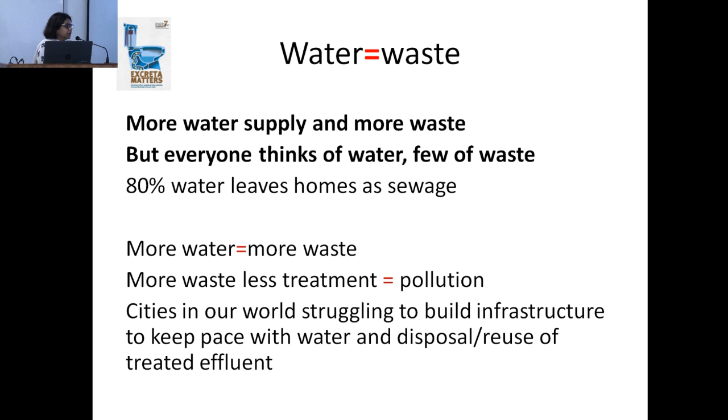Rajiv Ranjan ji here is the head of the Ganga mission, one of the most important initiatives of this government. What we are dealing with is a crisis of domestic sewage, and we're not understanding this as part of a common challenge. This is not just India—it's as much an Africa issue as an India issue. It's the pattern and paradigm of water and sewage we are adopting in our part of the world.

A few months ago, Desigan invited me to speak to water engineers in Cape Town, right after Cape Town had just missed its 'Day Zero,' when the city was going to run out of water. It was clear to me that Cape Town was in that crisis not just because of climate change, but because of the system and paradigm of water and waste it had adopted.

The system and paradigm is very simple: cities are getting their water from longer and longer distances today, because either local water is unavailable or contaminated. You cannot get water from the Yamuna anymore because it's so contaminated—you have to bring water long distance from the Ganga for cleaner water. But this increases the cost of water supply, distribution costs, and losses, and cities find it difficult to recover the cost of water supply.

More than that, cities have no money to spend on waste treatment. If you supply water, you will have waste to take back. But the cost of taking back the waste, intercepting it, conveying it, and treating it to potable levels is high. And remember, your rivers today have lost their assimilative capacity, so you literally have to treat the water to near drinking water quality before you can discharge it into a water body.

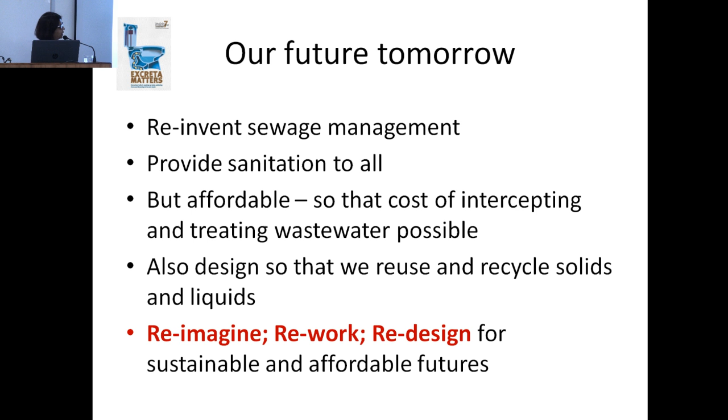Arne is here. Arne was the one, Mishraji, who introduced us to what we call shit flow diagrams. He was the person who came to see me and discussed this, and I am obsessed about shit or excreta. So when he came to CSE he said, I want you to do shit flow diagrams. I said, what? But it has really helped, because the shit flow diagrams help us to envision a city.

Because the shit and the excreta is so underground, and as I said, when we did our 71 city analysis, we understood the water supply, but we really didn't know where the sewage was flowing. What the shit flow diagram has done is help us look at the city, city-wide. You get an idea in terms of the on-site system, the off-site system. You understand if the excreta is collected and how. How is it transported? How much of it is safely disposed of?

And today in India, I was asking Bitush. Bitush told me that India would have at least 500 to 600 shit flow diagrams now done for different cities. Dinesh is here, he has done excellent work doing shit flow diagrams. There are many others, so now a lot of this mapping has happened.

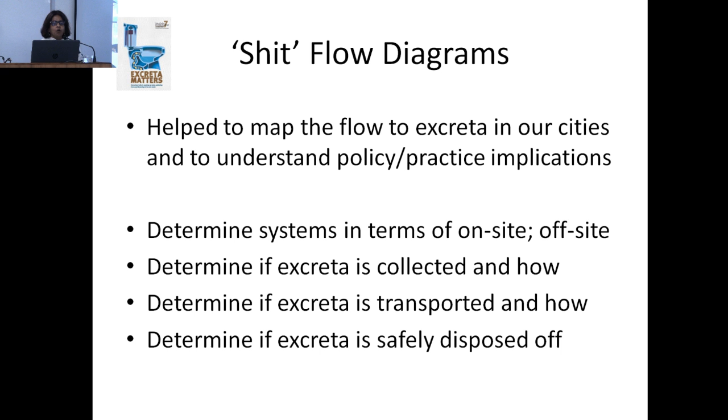When my colleagues, Suresh's team, worked on UP, we came up with these two reports on septage and cities of Uttar Pradesh, an assessment of excreta management done through the tool of shit flow diagrams. What really came out, Mishraji, and I think this is a very important revelation true for most regions of India, is that 70% of the state of Uttar Pradesh is what you would call on-site, which means anything from a well-designed septic tank to a tank, to nothing more than a hole connected to a drain, but it's on-site.

We also found that 80% of the septic tanks are connected to open drains where the liquid is discharged. 50% of the septic tanks are mechanically cleaned, so 50% are not. 90% of the septic tank waste - and septic tank is in quotes because these are not well-designed septic tanks - is not treated, and is disposed of in drains, rivers, and land.

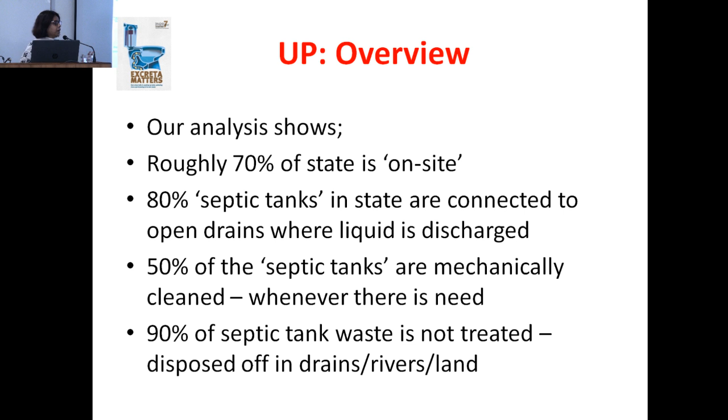73 to 80% of the sewage is flowing into open drains, it is not collected, it is not safely treated, and that is the crisis of pollution today.

But this is what excites me. When I saw these charts two years ago, I actually got really excited because I saw this as an amazing opportunity to reinvent completely. Because at some level, if these systems are far more cost effective, you're not building underground sewerage, which, when I did our book Excreta Matters, cost 1 crore per kilometer.

I'm sure it's gone up to 5 crore a kilometer now.

You also have to think about it very differently, that people are managers. If the septic tank is overflowing, people will get a backflow.

One of my solutions, Rajiv ji, has always been to the Ganga pollution, that you put a plug on every drain that flows from a city into the river. Let there be a backflow. Let every drain flow into the city. Then people will know what sewage is all about. Why should the river get our sewage?

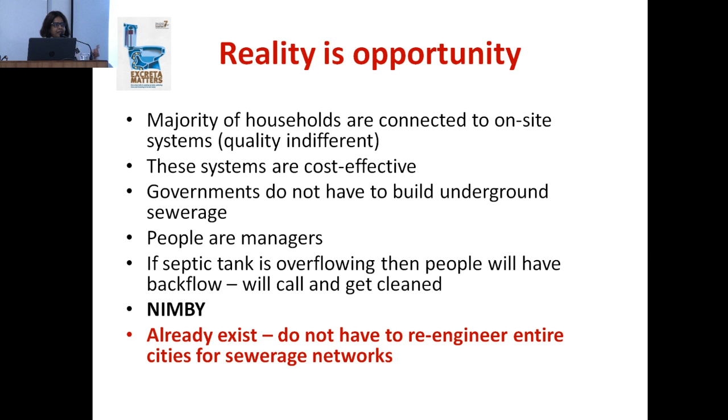And why this is possible is because this is what the world is doing. Just think about it, all of us today have mobile phones with us. I am of a generation which actually had to go to somebody very important in government and get a connection for a phone because it was a landline. Today we have all moved to mobile phones. We have all changed the way we actually do communication by getting rid of the landline.

The energy system is talking about doing rooftop energy systems. So why, in the case of fecal sludge, why in the case of sewage, can we not skip, leapfrog the landline system in which you laid the pipes before you could get sanitation? You could think about it, and you are thinking about it, we are all thinking about it, as a completely different future.

So what is this conclave's agenda? I want to lay down some of the questions I have. And I want some amount of discussion, and I'm hoping over the next 2 days we'll have that discussion so that we have a clear idea how we move forward.

My first question is, what is the right legislative framework for this on-site system, for on-site sanitation systems? Because currently, if you look at it, we have the Environment Protection Act and we have city bylaws. What is the best municipal bylaw system which needs, because you have an urban policy. The urban policy is a good peg. But what is the actual legislative framework you provide for sanitation management at the city level is something we need to learn from cities, what's happening, what's working, and then come up with the right model that we can adopt city after city, state after state.

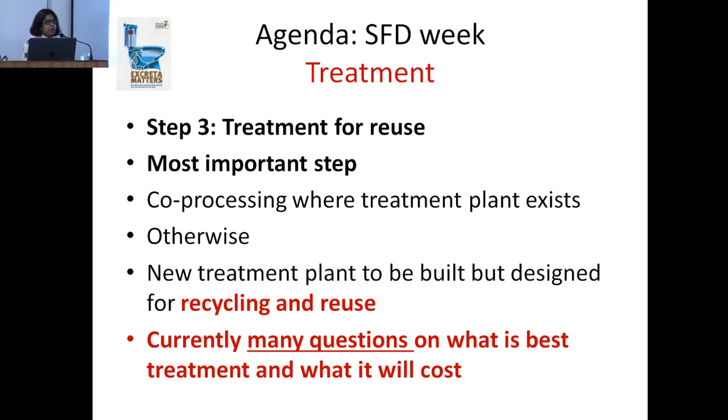The system that I really want to ask about is, what is the best treatment system? What will it cost? One question is what do we mean by fecal sludge? A lot of systems are designed so that liquid and solid is mixed, and a lot of systems are designed so the solid is separated from the liquid. The characteristics of the waste change enormously, and that's why the question becomes, how do you design a treatment system capable of handling all of this?

On the third day, we're going to spend a lot of time understanding each of the treatment systems cities are designing, and understand the inlet and outlet parameters. The biggest question is, how does the sludge and effluent discharge work, what are you designing your system for? Are you designing it so that, like a conventional sewage treatment plant, you discharge treated effluent onto water and keep the solid sludge on land? Or are you designing your system very differently, for reuse? That, to me, is the other exciting part of this agenda.

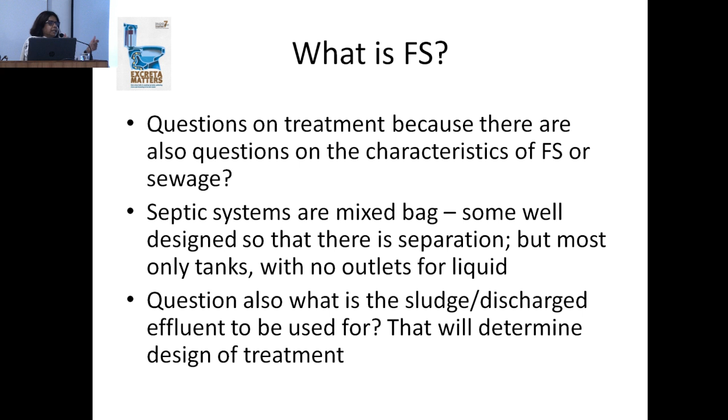The fact is, current sewage systems are water-based systems. You take a little bit of human excreta, nitrogen and phosphorus, flush it using water, convey it using water, and after treatment your disposal is also water. This destroys the nitrogen cycle of the world, because we eat the nutrients and excrete the nutrients. Using those nutrients back on the land would be a perfect circular economy, returning nutrients back, enriching the soil, and building much better nutrition for human beings.

So this is the real option that exists with these systems: how do you reuse and recycle and put it back on the land? This is where I think the maximum work is happening, Karthik is sitting here looking at how to use compost and excreta to make pellets for energy. This is where the big scale-up is possible, because it would mean you've fixed a lot of urban problems. You're not polluting your rivers, you're returning waste back on the land, doing something substantially different than the conventional sewage system.

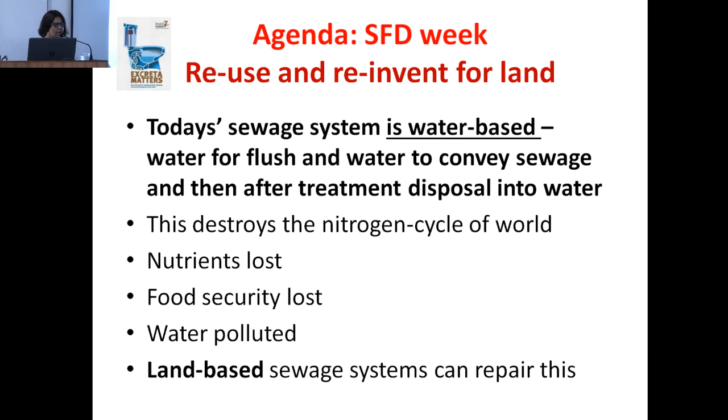The last two points I want to make are, I think this is going to be at least CSE's focus: for us it is a city-wide sanitation approach, and the outcome is the quality of the river. So we need to measure and monitor what we're doing for the entire city. And the bottom line has to be affordable sanitation for all, that you're intercepting the sewage of all.

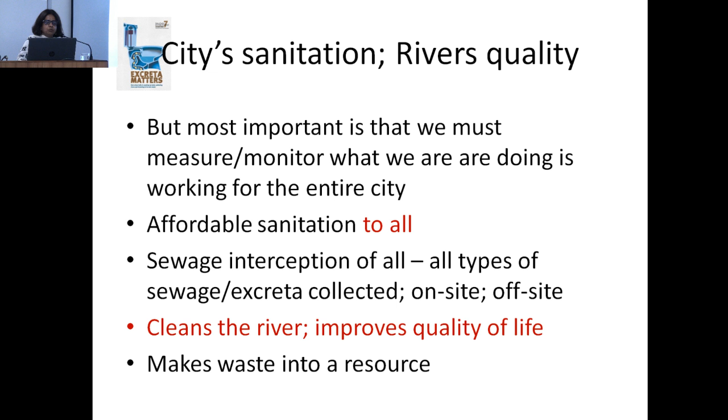That's where we need to break the silos. We cannot only say it's only septic tanks; if there is other sewage, we need to intercept that as well. So you need a city-wide approach. And the ultimate answer has to be: does it clean your river? Does it improve the quality of life? Does it make the waste into a resource? That, in my view, is very much possible.

This is really the agenda for the next two days that we have. We deliberate on what is possible, how can we make it work. We learn from the experiences and practices of many people working on the ground, and then see how can you upscale it, replicate it, build it into government policy, because that's the scaling up we all have to work towards. It's government and city policies which will really make the scale-up possible.

Because finally, let's be very clear, we all live downstream, and your waste is my water. And that's really got to be the message for our work on FST. Thank you very much.

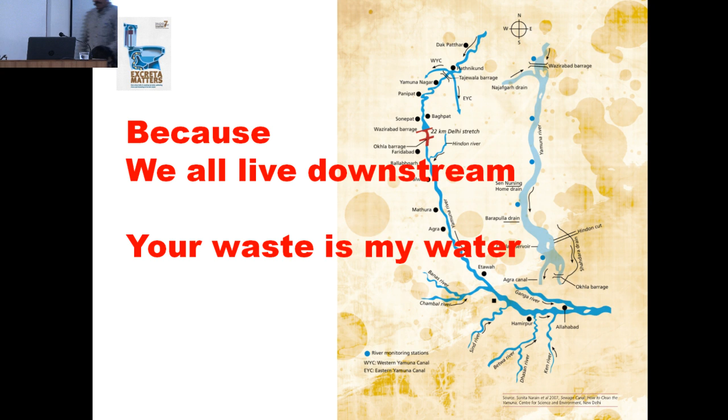Thank you, Sunita, for the powerful message and setting the context. Now we have Water Research Commission CEO Dhesigen Naidoo. He is representing Water Research Commission, which is a partner institution of CSE. We work under the global program in South Africa. And I should tell you, they have also gone through a major crisis.

South Africa, Cape Town, was the first city to go dry, and people really started rethinking that. They are also the country which has taken lead from the SFD work, what we are doing in India, and they have decided that across South Africa, they would do shit flow mapping or excreta flow mapping, if I am allowed to use this alternate term. And we partner with them.

We are also working on how we can address the issue as together water and sanitation is seen. We have a partnership with Water Research Commission on water sensitive design and planning. My friend Jay, who is here, he has said that why only water sensitive? Why can't we have sanitation sensitive design and planning? So this is a very interesting thing. We connect water and sanitation. We cannot talk separately. And Dhesigen, here, invite you to share your experience.

How did you save the city of Cape Town? And how can we learn from this experience and the SFDs and many more things to come? Thank you. Your presentation, I know, is loaded.

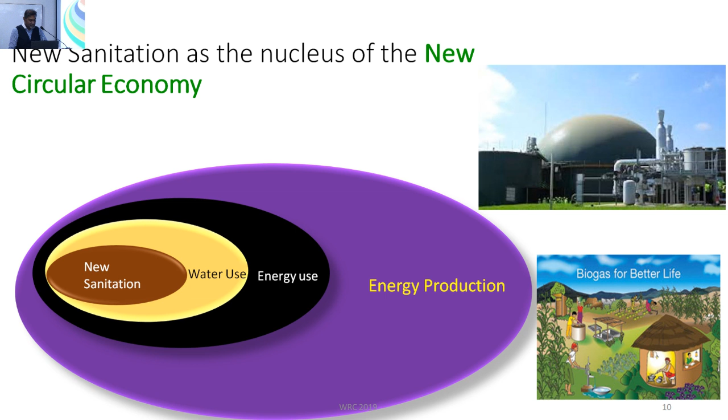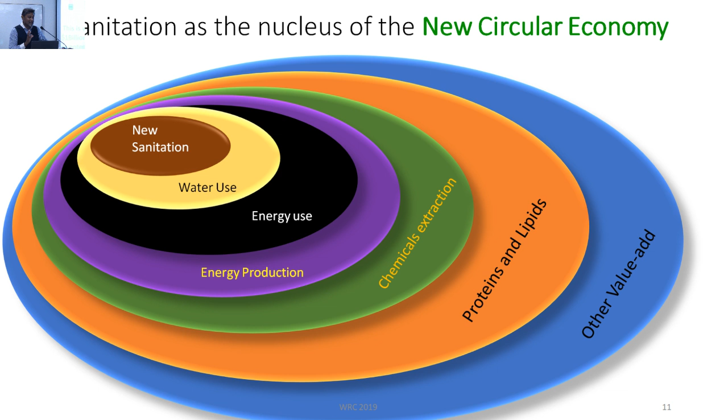There are other very interesting value adds — I'm not going to go too much into that, and I think there's some space later in the program to unpack some of these in more detail. But making the case for a $1 billion a year industry has actually become quite easy, and not on tomorrow's technology platforms, but on the technology platforms that already exist today. This is an idea we should capture and start running with.

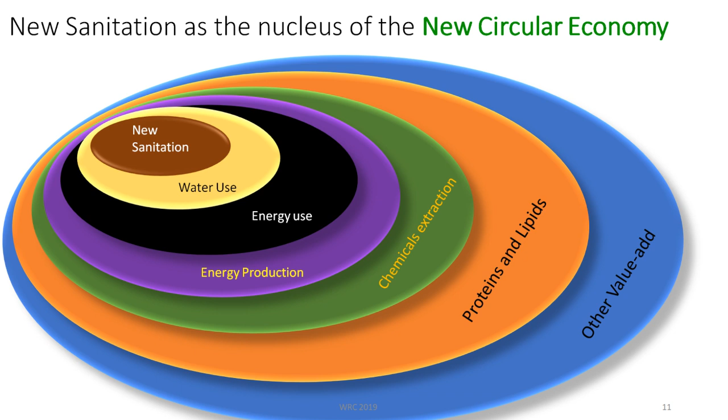In South Africa, we have done some things in the government space to help us along this road. One thing we have is a national industry policy framework, which in every year revisits priorities in something called the Industry Policy Action Plan, or IPAP. The 2017 version of this included water and sanitation as a priority, very specifically new sanitation.

Now, what this means in the South African context is that it provides the prioritization for all the public agencies that co-sponsor the development of industry. We're talking about the Industrial Development Corporation and the Public Investment Corporation, and a whole range of instruments around that. So it's actually quite a powerful tool.

So moving a little further, the fourth lesson that comes out of Cape Town is that organizing around a very old practice of certain units sitting in government, with a technical base of professionally trained engineers and practitioners, is in fact sufficient to manage the water and sanitation system in the world. It is not. It actually never has been. And so the idea around expanding these teams and empowering the people around us to participate in these teams is in fact the only way to go.

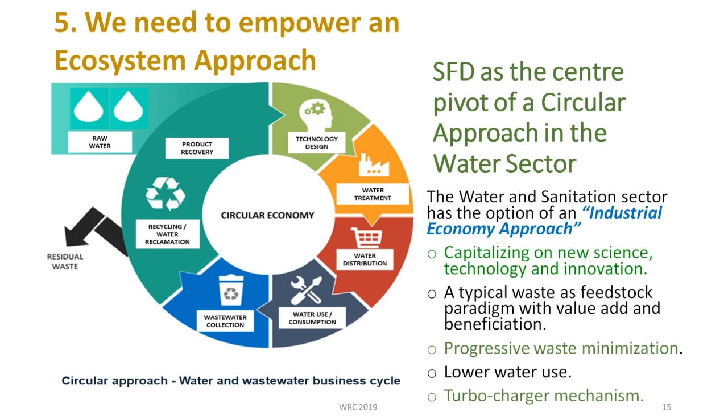So colleagues, that's what I have to share with you this morning. All of the work is also supported by bunches of reports that are available to you free of charge on the internet from the WRC website.

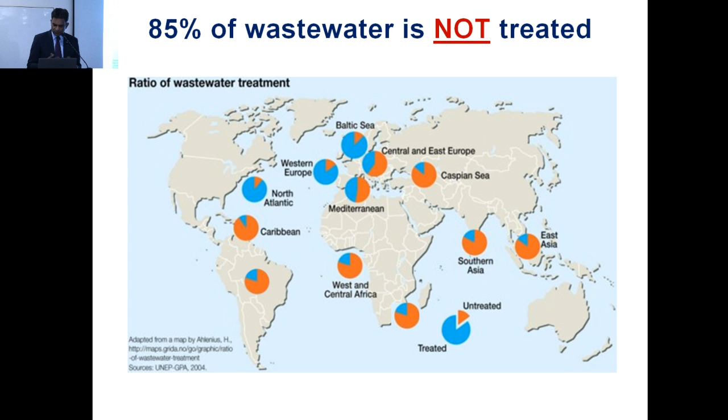You still have problems where we're not dealing with this fairly toxic material that creates huge environmental issues. Of course, we have really ignored at our peril the whole area of non-sewered sanitation, which the majority, particularly in the developing world, experience. Historically this was a very neglected space and it was ignored, so you had fairly inelegant solutions to these problems—quite dirty, not very efficient, and very ad hoc. But now you see much greater attention being paid to non-sewered sanitation, and we are slowly seeing much more elegant solutions that are becoming quite cost-effective.

Also, the opportunity that Sunita mentioned about recovering value from our waste streams is potentially giving us a chance to sustain the sanitation delivery chain from some of that generated revenue. There's been quite a lot of work done in this space, and from my perspective, I think this is where the focus will be in the next 20 years—the golden era in terms of wastewater and sanitation. You see huge investments taking place in Asia, both in China and in India, and Sub-Saharan Africa having a big interest in deploying both non-sewered and sewered sanitation systems.

In terms of non-sewered sanitation, there have been a lot of developments, and organizations like the Gates Foundation have been instrumental in pushing some of this innovation. We're starting to adopt very systematic approaches to the design of these systems—they're no longer ad hoc, but actually being engineered in quite an elegant way. You're seeing decision makers in some utilities who were always fixed on going for a sewered approach slowly starting to appreciate that non-sewered sanitation is probably more appropriate for their context than having a sewered system.

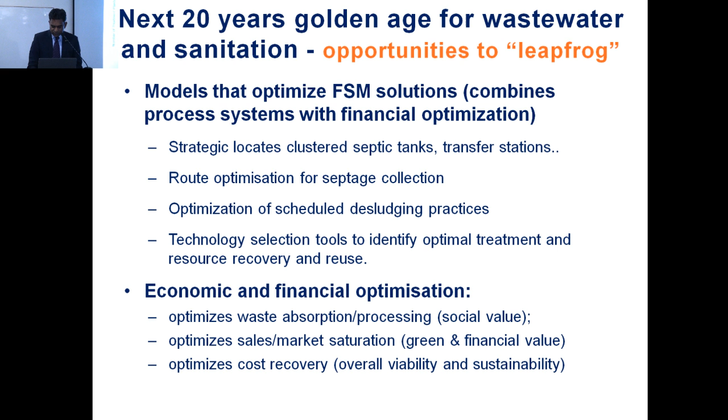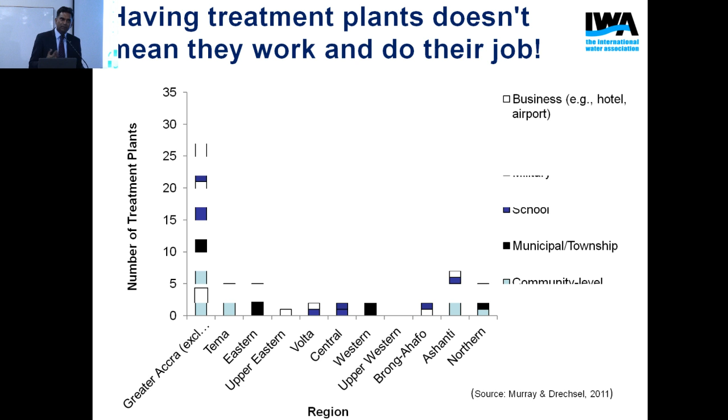And this is what is resulting. But what's interesting for me, coming from a developing country myself and having worked a lot in the developed world, is that when you look at wastewater provision in the developed world itself, the last 50 years was really like a pilot study. They started building very clumsy systems, huge grey infrastructure that was over-designed, and they iterated over the last 40 to 50 years.

Now you're starting to see some optimization taking place, with innovations particularly in changing the physics of these systems that reduce their overall footprint and energy cost, making them much more efficient. But in the developed world, they don't have the capacity to adopt this because they have so much legacy infrastructure.

But I think for the developing world, there's an opportunity to capture some of these interesting innovations that improve the settleability of our sludge, for example, or allow us to increase loading rates in our digesters by heating them. These innovations could potentially allow us, if we do go for conventional wastewater treatment systems, to develop them in a much more innovative way, contextualized for our conditions, so we have small footprint, low energy systems. I think there's a huge opportunity.

So I think both in the non-sewered sanitation space, you're seeing the evolution of very elegant and efficient systems, but also in the more conventional wastewater space, I think there are these opportunities.

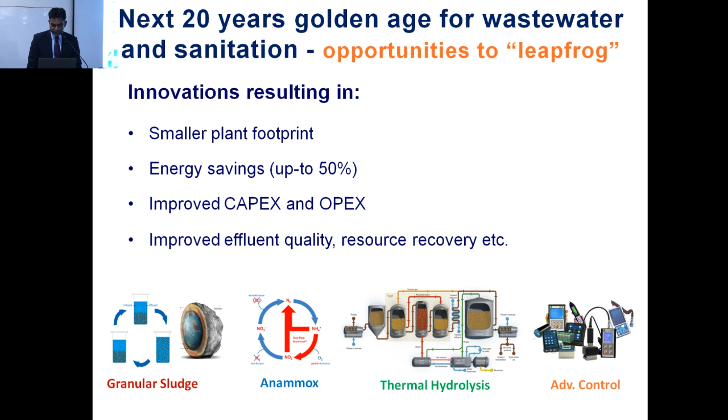So the question, as I think Desigan pointed out, is do we apply 19th century approaches—these very linear, highly energy-inefficient, centralized systems—or do we go for something a little more elegant, a little more clever, either non-sewered or sewered, but understanding where we currently are in terms of technology.

Now, when I think about decision makers and what they're struggling with at the moment, it's really that the status quo is not an option. As was pointed out earlier, there are lots of global change pressures we're experiencing. Of course there's climate change affecting our water resource availability, both in terms of quantity and quality—both too much water and too little water. It's affecting us. But people, populations are growing, particularly urban populations, and these populations are not only growing, but growing up, so their rate of resource utilization is also increasing. So we cannot continue to run our systems the way we've done before.

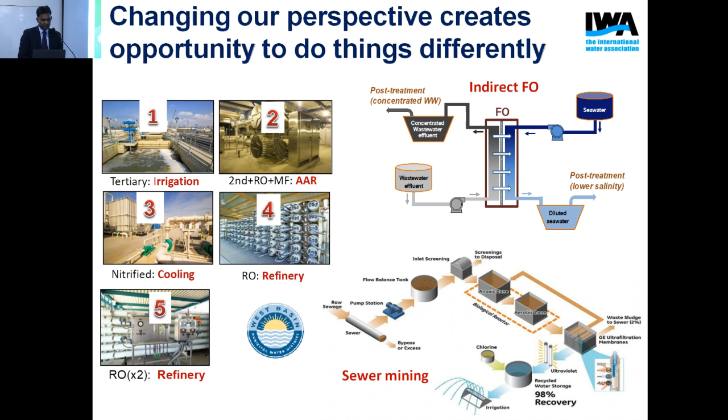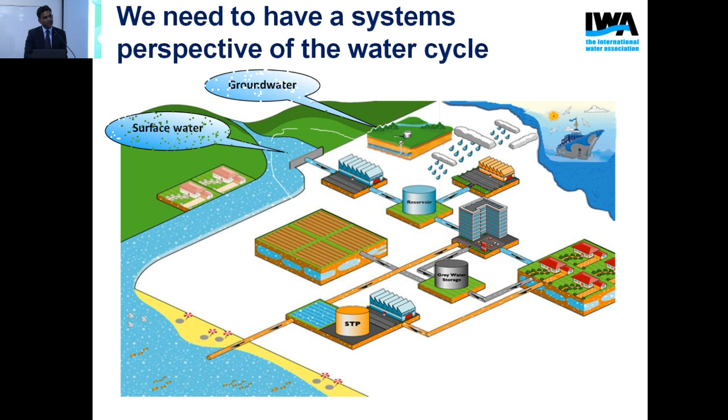The key to doing that is to have a very holistic view of your water cycle. So you don't look at drinking water, wastewater, and stormwater separately, but view the cycle as one, and look at all the waters that flow within that cycle. You recognize that all of this water is good water—it's just water of different qualities.

You start to ask: for certain types of demand, where should I put my investments in terms of water? If I have demand for more drinking water, do I pump more surface water, or invest in leakage reduction—which is actually high quality drinking water—freeing up more drinking water, or in water conservation? If I want to water my plants, can I use grey water or treated black water for that purpose? When you look at the entire water cycle as one, you start to be able to do water balancing—this is quite a major shift in the way the water sector views water flows.

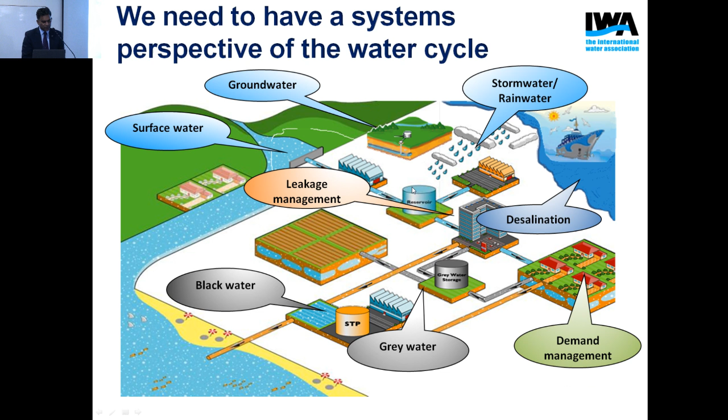Critical to this is modeling, and this is where you try to connect the dots—connecting these different flows for these different uses. What you start to do is invest in efficiencies as opposed to investing in new infrastructure to move water. You see a lot of development in this, with modeling where people start to model packets of water, and those packets have signatures in terms of the effort used to produce that water and its qualities, so you can match that water to that need.

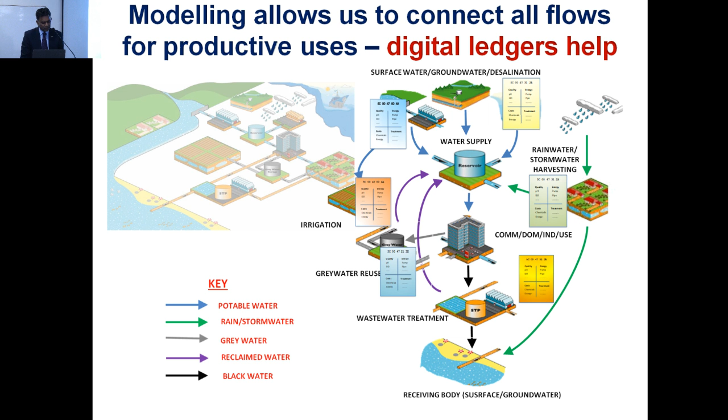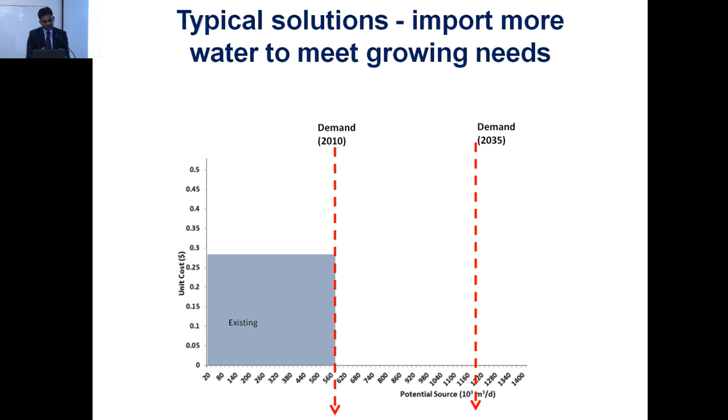This is an example of work we did some time ago in Nairobi. The traditional engineering response to growing demand was just to find new surface water—that was the traditional, left-brain thinking. But once you start looking at water in its entirety, you realize there are lots of flows within the system that allow you to meet that growing demand without investing in new infrastructure. You can bring the unit cost of water down by investing in these efficiencies. And if you do more exotic things, like treating black water, the price of water might go up. So these models really allow you to recognize where you should put your investments—it tells you.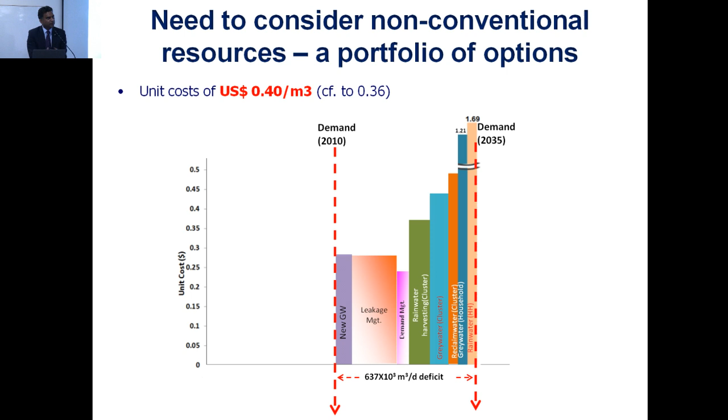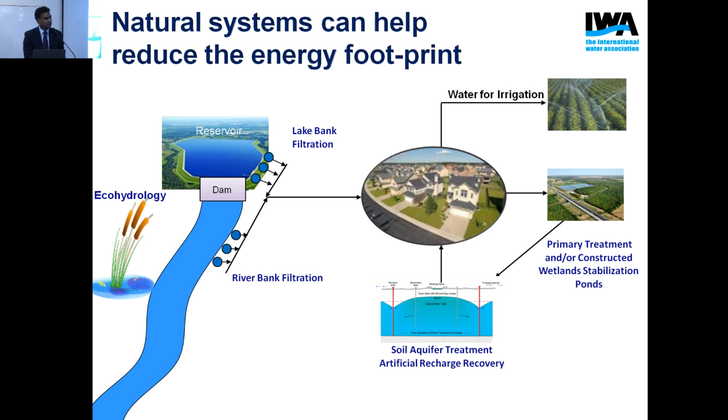And of course, it's not only using grey infrastructure type technologies. Natural systems can play a huge role in closing the water loop. You can protect your water bodies with vegetation and eco-hydrological approaches. You can use things like river and lake bank filtration to treat your water before it gets into supply. And on the wastewater side, you can use constructed wetlands coupled with soil aquifer treatment to polish your water before reuse. These systems have much greater adaptive capacity and can manage shocks much better than grey infrastructure, but there's a land requirement associated with them, and the energy cost is low.

So what I was really talking about is very much a systems perspective. You start to view your urban water as a system, but actually water is a system of systems, and the city is only one user. Once you start looking at your entire watershed, you start to observe opportunities to do clever things.

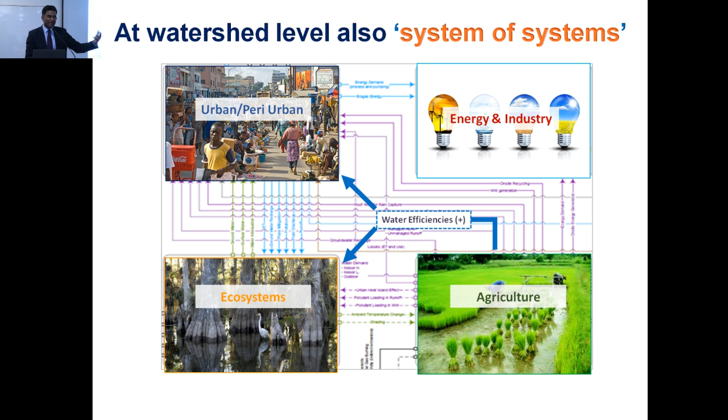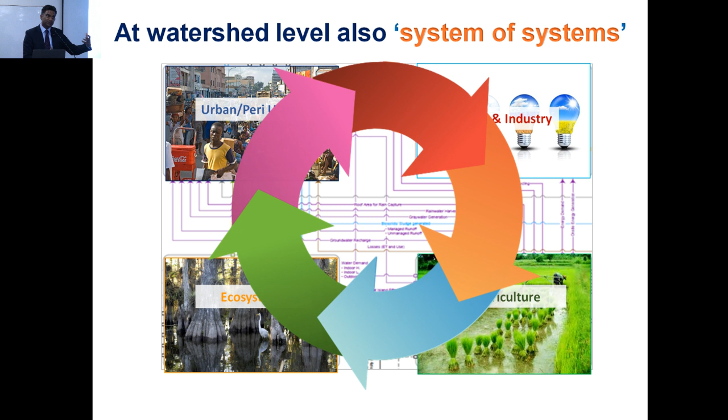As an urban person, we tend to optimize our urban system, but there are synergies that take place between these different sectors. If we start viewing the watershed as one, we can develop solutions where we're investing in another part of the water cycle in order to reap benefits within our own water cycle. I always say in a country like India, the urban water sector and agriculture have to be like brothers and sisters, because the synergies and benefits of them working collectively, in terms of reducing the overall water footprint and using nutrients we can recover from our waste streams, is huge.

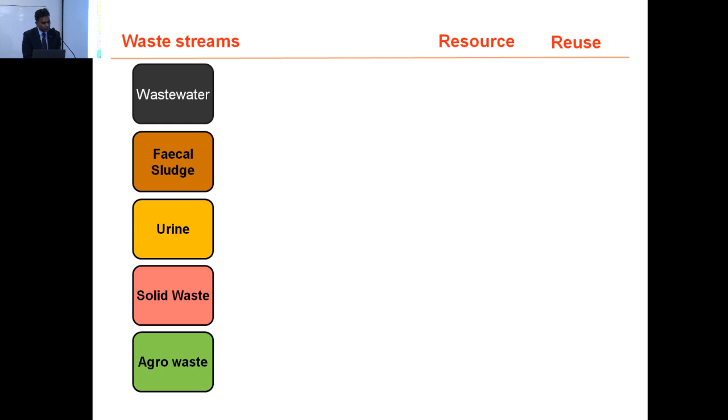The other big change you see in the water sector, and it was talked about a lot, is the way in which we view waste. It's not just our wastewater or fecal sludge, but there are lots of other wastes we can combine to produce various types of products. It's about thinking how we can co-digest or co-utilize lots of the waste streams to produce both energy and water, because a lot of this is water, and things like nutrient recovery.

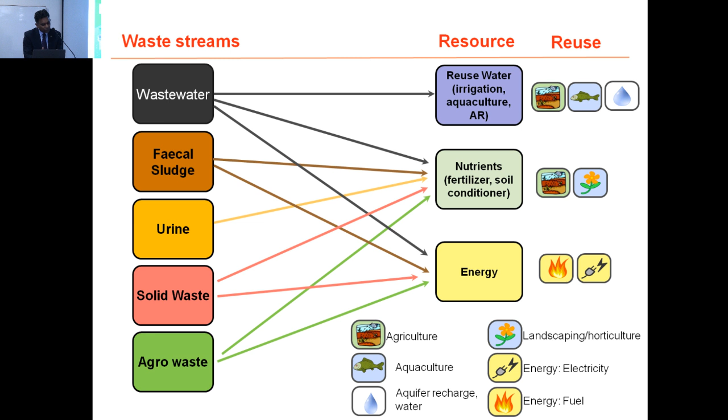Viewing the water cycle as one allows us to understand where within the water cycle there are opportunities to recover, say, energy, which could be upstream. The Water Research Commission has done work on microturbines on the drinking water side. If you have sewers, you have opportunities to recover heat, and if you have elevation, you can generate energy through turbines, either in a decentralized or centralized approach. And then nutrient recovery through, say, fecal sludge management, big opportunities, but also within your treatment works.

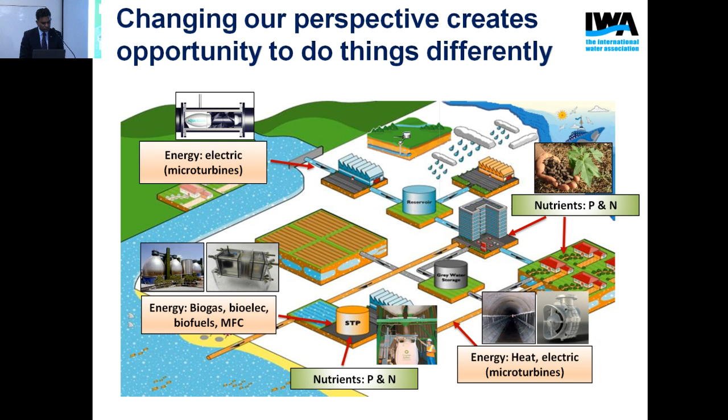The biggest challenge in that space of resource recovery and reuse, as mentioned earlier, is that we don't actually fully understand the business models. What we tend to do is engineers talk about how much of something they can produce - they say, I can produce so many tons of fertilizer - but they don't really understand if there's a market for that, and they don't understand what their competitive edge is against other fertilizer producers.

What's really important is to shift our thinking a bit, on the creative side, to understand that if we produce these fertilizers, who are our customers, what is our value proposition to them, and what are the costs associated with channeling that value proposition to those different customer segments. We did a lot of work on this and found that a lot of these systems currently don't work - they work when there's risk capital supporting them, but when that risk capital is withdrawn, they're not sustainable. It's still work in progress, but clearly this is the direction we have to move in.

They think that because they're producing fertilizers, they're making a lot of money. This is deployed in big plants in the United States and in Canada. The largest wastewater treatment works in the world, the Stickney plant, has this.

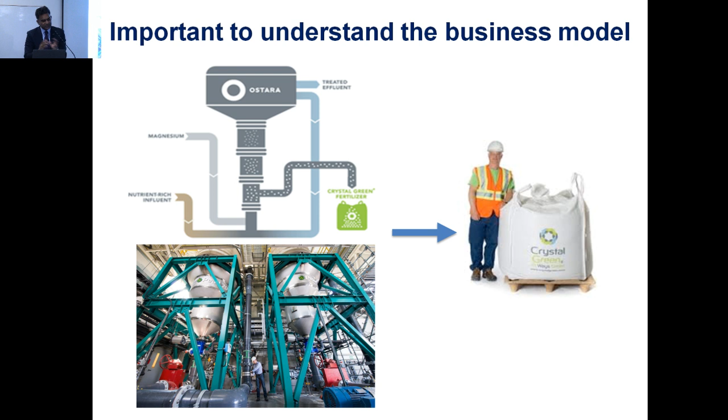What we're finding now is that this idea of thinking about the productive use of water and looking at how to recover resources, the language in the water and sanitation sector is changing. We are now starting to not talk about water treatment or wastewater treatment. We're starting to think about machines — machines where water is actually the feedstock, and it can be water of different grades coming from different sources.

So it can be water that's already been used, or water coming from the surface or groundwater. And this machine, with various types of technologies, you turn the handle, and it can produce waters of different qualities for different users. This machine can produce energy, either in the form of heat or in the form of electricity, and it can produce nutrients.

People are now starting to say, are we actually designing an energy machine where water is a byproduct? And if that's the case, what type of technology should we use, and where should that machine be located? And if we're trying to primarily produce nutrients, again, what type of technology and where should it be located?

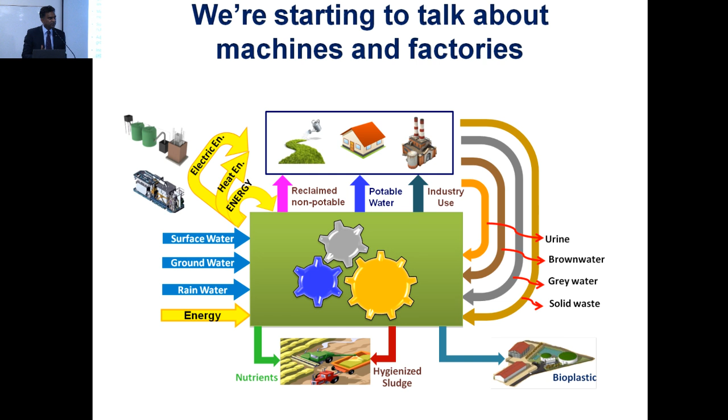These are some examples, I'll skip them, but what you're finding is that when you're trying to do these clever things with water, size starts to matter — scale. Water is quite heavy, so if you want to reuse it, you don't want to move it long distances and then move it back. So these centralized systems don't work very well for these clever things.

What people are finding is that if you can create decentralized systems for populations of around 30 to 50,000 inhabitants, you can do these clever things. And what's interesting is that if you have emerging areas, populations that are growing, you have this adaptive capacity — you can slowly start to grow your services over time. You don't have to invest in large centralized infrastructure, but can add modules because you're dealing with decentralized solutions. So it gives you a huge adaptive capacity.

I'll skip this. I just want to go on — by the way, at IWA we have a program called the Water-Wise Cities, which talks about some of this.

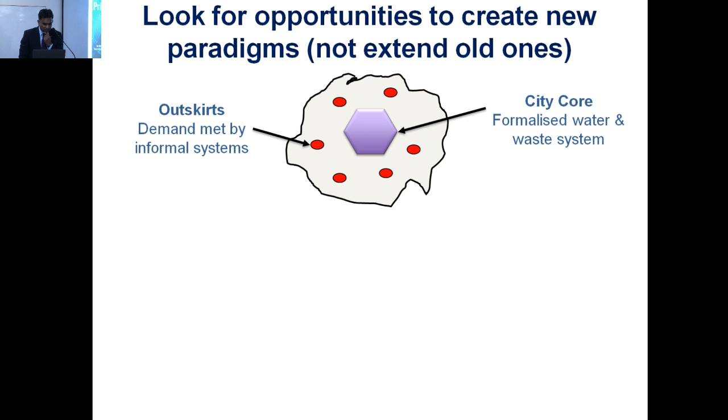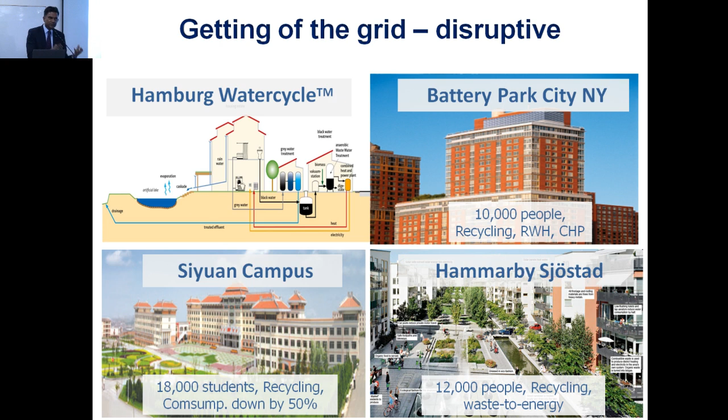I think we tend to believe, going back to the grey infrastructure within the water sector—and this is thinking from a colleague of mine, our vice president at IWA, Sudhir Murthy—that the wastewater sector is full of elephants. Elephants are animals with very long gestation periods, so there's a lot of thinking done before you deploy them, and there's a correlation between long gestation periods and long lifespans. We tend to think our water systems are basically elephants that will be there for 50 years.

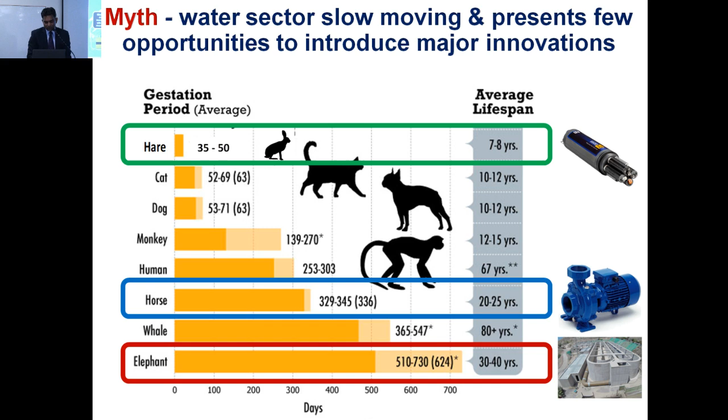This is from where Sudhir used to work at DC Water, where they had a very old system full of elephants. But they started to deploy these technologies—mainly horses, mixing devices, the Cambi process—that changed the physics of their processes so they could increase loading rates and efficiencies. So what they could really do is repurpose the elephants and get efficiencies.

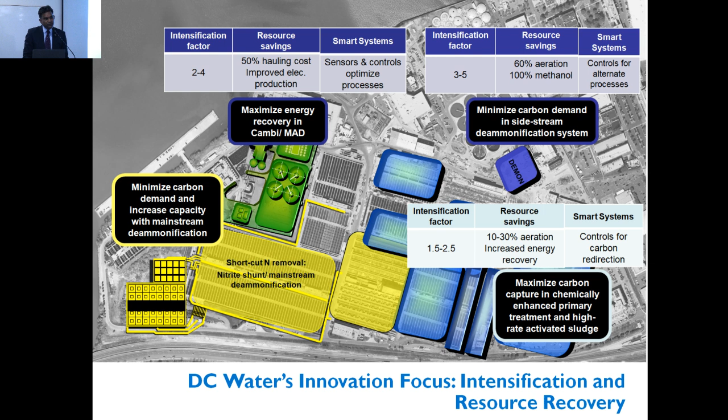But the key to this is to really decouple the way we think of our structure. We tend to think of it vertically, so the elephant dominates everything. But if you decouple this and think of it more horizontally—where the people who procure the rabbits and the horses are independent of the people running the elephants—then you can constantly innovate. This idea that we're conservative because of elephants is really wrong, but it's the way the culture of the sector is; we tend to let the elephants dominate.

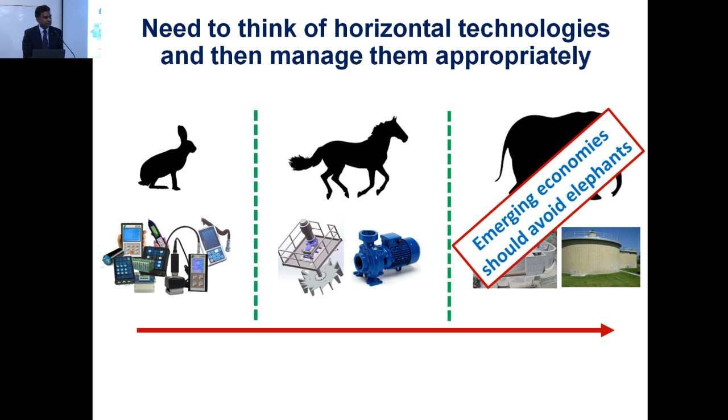The big opportunities for us are to look outside our sector for control mechanisms and digitization, and for mechanical devices that improve the physics of our processes—that really allows us to improve the overall efficiency of our systems. And in these emerging economies, you would avoid at all costs putting in a lot of elephants, so you'd go for more package plants and avoid building large concrete infrastructure.

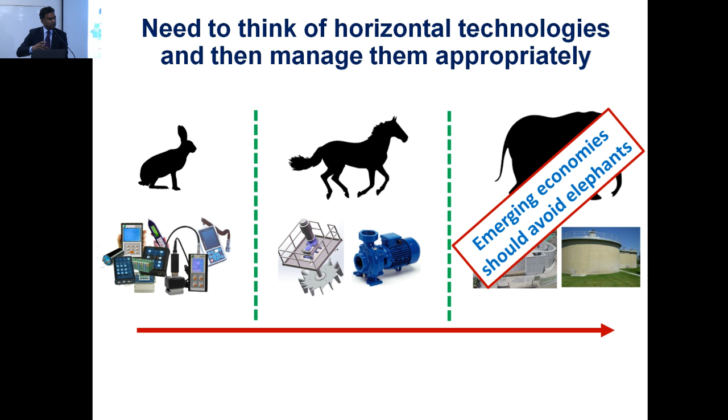I'll finish with this slide, which I always end with. We can stay in the lane of business as usual, which, with all the global change pressures we're facing, is clearly not an option. We can try harder, still building these clumsy systems and optimizing them as far as we can, but that won't meet our needs in terms of the supply-demand deficit. Or we can really shift to a totally different approach, rethinking the way we use and reuse water, moving towards a more circular economy approach. I think we have to really be in that lane.

So that concludes my presentation. Thank you.

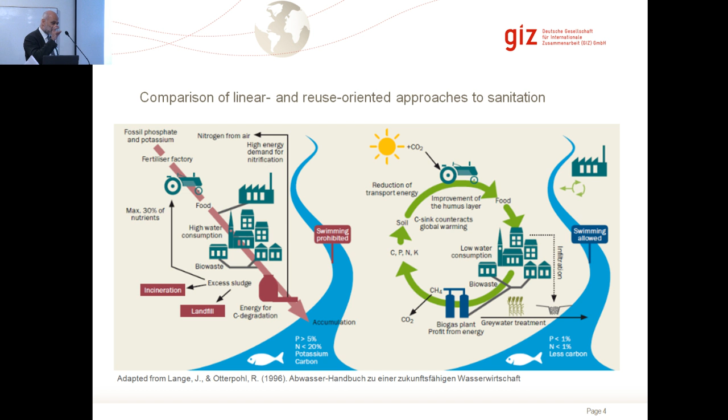Another thing that came from EAWAG was that we should talk about sanitation systems - not just toilets, not just treatment plants. Let's stop the discussion of sewered versus non-sewered. Let's talk about sanitation systems, look into these elements, and bring them along a sanitation chain. That was a quite new discussion. The first eight Susana meetings, we were sort of the sounding board for a publication that turned out to be the compendium by EAWAG, which brought that together. Again, today this is simply mainstream. So that's as well what we achieved together in the last few years.

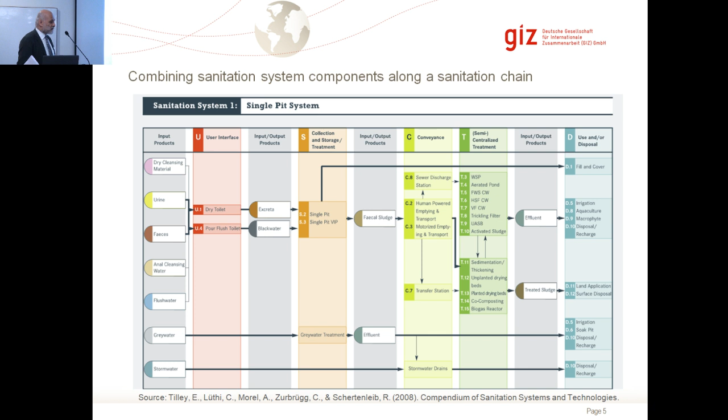At Susanna we said the SDGs are catching up with us, because our vision paper and our principles were to look at the chain, look at central and decentralized systems. That's what we discussed in the MDG era, which was more focused on access and toilets, and we said we have to take into account the whole system. We were lucky that all the Susanna partners and beyond worked for an SDG around water and sanitation, and we got it, and now it's looking at the full system.

It's a similar discussion in India, from ODF to ODF plus and ODF plus plus. ODF is more on the toilet side, but to really get it done you need the plus and plus plus, and it's very positive. We formed the Susanna India chapter. I think it's a small contribution, but it's in that spirit of going from ODF to ODF plus and plus plus. Then I was out of the sector for five years as country manager for India, with many things to do.

When I came back in 2014, I saw this at a conference, and that was the first time I saw a shit flow diagram. I was saying, wow, that brings it all together. It brings together going along the chain, it brings together central and decentral systems, and it brings together, in a very easy to understand format, what goes right and what goes wrong. So I said, I want to have a controlled explosion of the shit flow diagram on the Susanna page. And the inventors said, okay, let's do that.

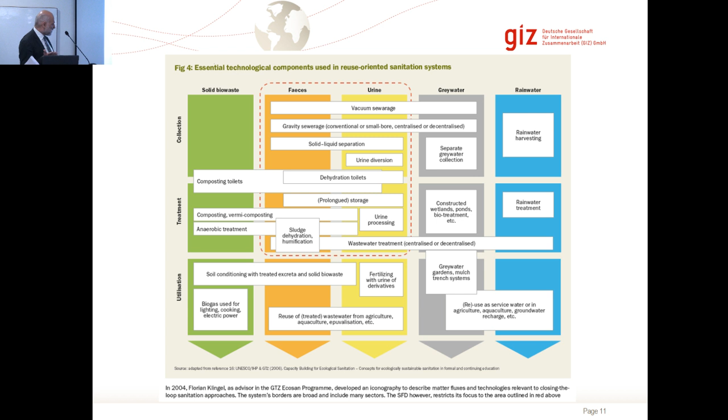Similar with fecal sludge management, it's again sort of the middle line. It's not usually looking at solid waste management and rainwater. It's limited regarding the broader idea of reuse, and sometimes, as you can see from the different technologies depicted there, these technologies are cross-cutting. You actually have to look at organic waste and fecal matter together—then it makes sense from a business model view. So you have to think broader.

So, my summary on the India context: there's an excellent policy framework, and I'm happy to hear that it's now being revamped, taking in some of the new ideas. The old city sanitation plans we did were already addressing access, water, wastewater, and organic waste. So it's possible within the existing framework, but it's good that it's now being improved.

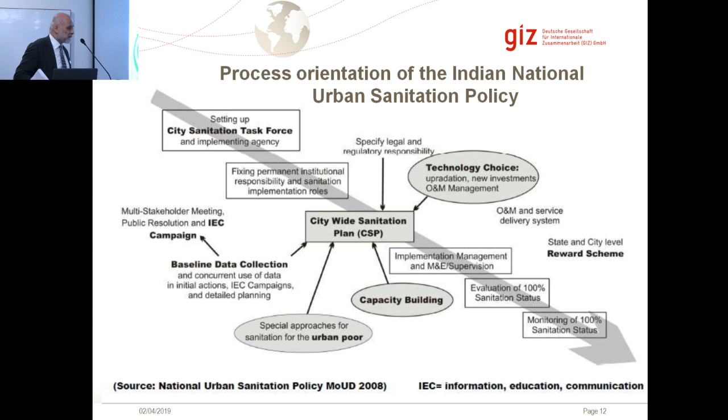My summary would be, we have to put it all back into the big picture. That's why I think, Sunita, it's great that we have the opportunity here to discuss that—put the SFD and FSM into the broader picture, understand the sanitation ecosystem in the context of Agenda 2030. That set of goals is not too bad. I think it's about creating and defining the set of tasks and jobs along the mosaic of sanitation chains.

We had the business models, and I think the idea is to think from the end. What's the product that has a market value, and how should I select the different system components that will give me that product? That's maybe how I should design part of a sanitation chain in a given context. And we need the funding mechanisms, and then we need the capacity for the workers, the planners, consultants, banks, and policymakers to get the whole picture working. I'm really looking forward to the week ahead with that. Thank you very much.

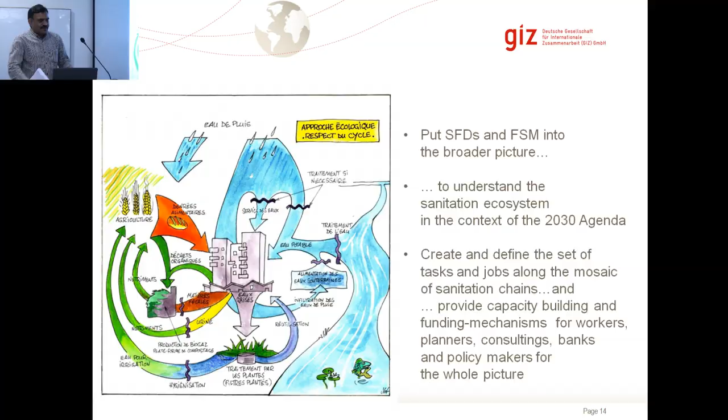Thank you, Anil, for taking us through this story of SFDs and the Susanna network. Going back to what we started with Sunita's presentation on Excreta Matters and the few unresolved questions and various issues we were talking about, there should be a convergence between sanitation and the river pollution efforts. It's also very important to see that today there is a real convergence, at least at the governance level, with two concerned people here - from the Ministry of Housing and Urban Affairs, and the Director General of Namami Gange, National Mission Clean Ganga, both on the dais.

Real convergence starts when we start talking to each other. Now we have one of our guest speakers, Chief Guest, Rajiv Ranjan Mishra ji, IAS. He is the Director General of Namami Gange. He has been previously associated with the Ministry of Housing and Urban Affairs, and he is an alumnus of IIT Kanpur. Sir, we would like to hear from you.

We have an existing partnership - CSE has partnered with the Namami Gange program to support them in mainstreaming fecal sludge management into river pollution abatement efforts and improving river health. This is another dimension, Madhu, which will open up the entire focus, since earlier the focus of Namami Gange was only on centralized sewage treatment and conveyance systems with the ministry. Durga Shankar ji, we were talking about real convergence starting here, with both people on the dais, and that was the agenda 3 years ago. What Sunita was saying, we were trying to link river pollution with dots which were missing. Rajiv Ranjan ji, we look forward to hearing from you.